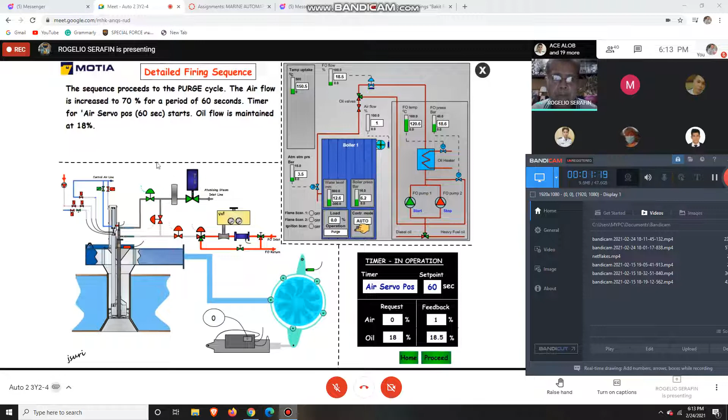Dito, ito yun siya. Naka-maintain yan siya ng 18%. Okay? So, nandyan siya. Makikita mo naman sa diagram, no? Okay. So, tuloy-tuloy yung andar ng forging fan mo. So, wala pa tayong ibang ginagawa dito kung maliban lang sa pagpasok na ng atomizing steam. Yan, nag-green color na siya. Okay, so we go for the next proceeding.

Okay, signal is sent to FD fan vane. Dito, yan o, magbibigay ng signal dito. Positioner controller. The FD fan vane start opening. Magbubukas to, hihilahin niya ito. Okay? If the airflow does not increase to 70%, the timer for air servo position expire. Air servo error alarm is activated.

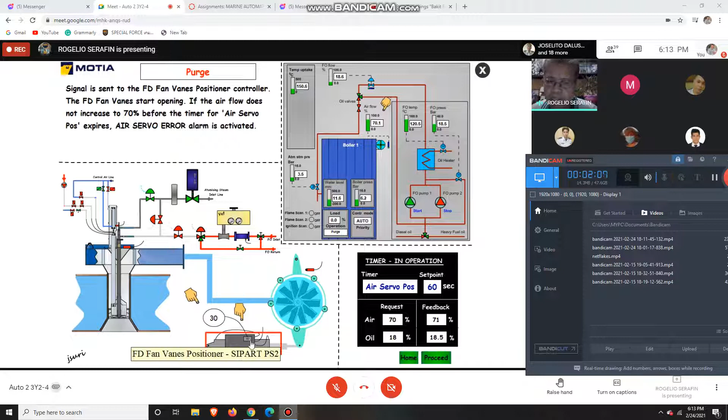So meaning, kapag hindi makumpleto yung 70% na ibinibigay niyang hangin dito, mag-a-alarma siya. It will alarm for air servo error with a period of 60 seconds. Okay. So, yun ang mangyayari. So, nagbibigay na siya ng signal dito na bubuksan na niya ito dito. Okay. So, once the airflow to 70%, the first timer 60 seconds start.

Okay. Mag-uumpisa. Ayan, no? Ang 70% na hangin na ibigay na niya, ang feedback is 70 also, 70-71. So, wala tayong problema dyan. Flow of oil is 18%. Ang kanyang feedback is 18.5. So, that is acceptable. No? So, walang alarm na nangyari. So, this condition is maintained for purging the period. So, ibig sabihin, pinapurge pa niya yan. No? Tuloy-tuloy yung purging niya.

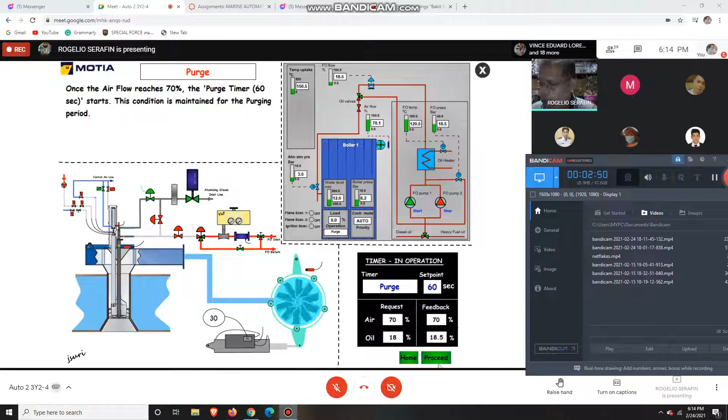And the next. Okay, so the next. Once purging expire, the sequence proceed to the next step, which is the ignition position. So, this will be your ignition position now. Here, this one. At ito, this is your diesel line. No? Itong kulay red na ito. Once na ito ay magbubukas at magiging green na ito siya, ito ay magiging green also to. This will be your ignition position.

No? Ignition. Yung ignition na sinasabi ko sa inyo, yung kanyang igniter, magbubukas. So, yung igniter niya, ang siyang magsisindi ng first stage of your burner. So, we have here two stages. The first stage is the diesel line, and the second stage is the bunker or heavy fuel oil. So, another name or another language of this is what we call the pilot burner and the main burner.

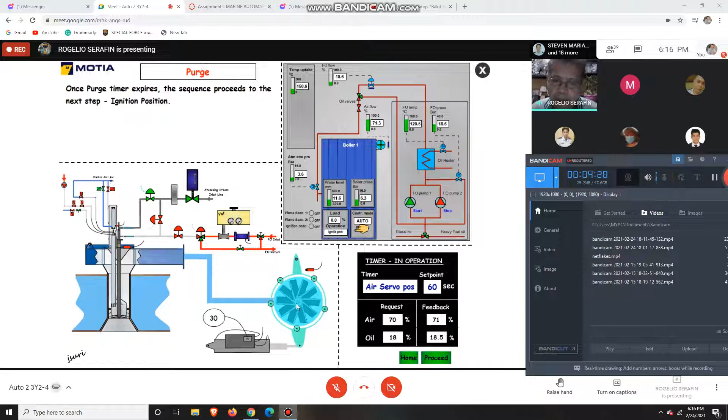So, dalawa ang burner nito siya. We have the pilot, which is this using diesel. And we have here the heavy fuel oil, which is this is your continuous firing. Okay. So, nandiyan na tayo sa ignition position. Still, purging pa rin siya. No? Maandar pa rin yung blower mo. So, air servo pos is 60 seconds. We are going to proceed.

Now, ignition position. Nakita na natin, no? Ignition position, pag yan ay nag-green na siya. Okay, yan ay green. Okay, nag-green na siya. Airflow reduced to 18%. Oil flow remains at 18%. The vanes positioner, start closing. This one, magsasara to siya ng konti.

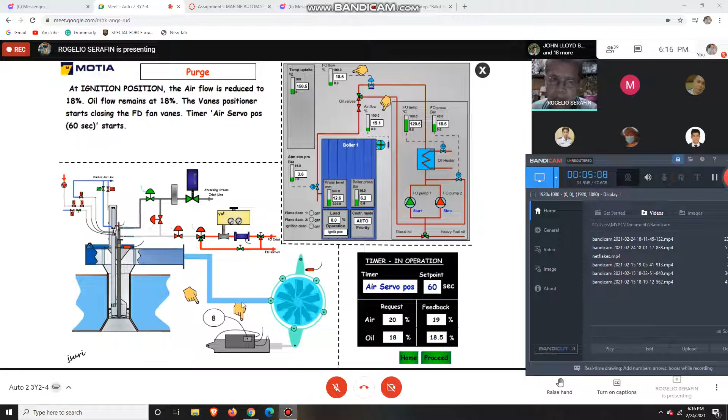The feed pump. Bakit siya magsisira? Para hindi mamamatay yung apoy dito. Kasi pag sobrang lakas ng hangin nito, mamamatay yung igniter mo rito. So the main position closing start FD fan, timer for air servo position is still 60 seconds. Tuloy-tuloy pa rin yung 60 seconds niya. Okay? So yan. Itingnan natin kung ano ang sumunod na mangyayari.

Okay. When the air flow does not reach 18% before air servo position timer expires, magkakaroon siya ng air servo alarm. So, kailangan umabot siya ng 18. Since that this is 20, this is already acceptable. Kasi nandito na tayo sa igniter position. Ayan, no? Nasa igniter position na tayo. Okay. Sundan nyo lang yung cursor ko, ha? Nandito na tayo sa igniter position.

And then, we go to first. Tuloy-tuloy pa rin yung purging niya. So, air servo alarm is activated. Else, the sequence can proceed to the next step. Ignition. The igniter position timer at 10 seconds start. Okay. Nakalagay dito, igniter position. Tingnan nyo dito sa may timer niya. And 10 seconds for the set point.

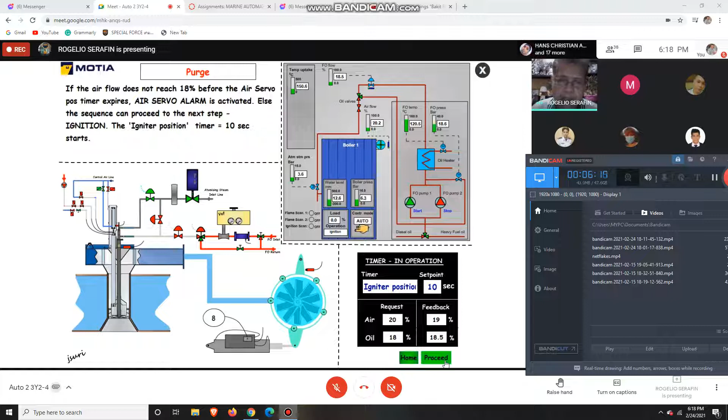Okay. So, let's proceed. Bantayan nyo itong fuel na to, ha. Bubukas yan pag naano na natin yung igniter. Okay, yun. Bumukas na yung fuel. O, kita mo na. Pumasok na. And then, the diesel is already started. Nag-firing na siya ngayon. Okay. So, it's already firing.

So, since that this is already ignited, ito yung igniter niya, dahil nagsindi na siya, nag-close na rin siya dito. Nakita nyo, nag-red na. Dahil mayroon siyang timer. There will be a timer to stop the electrodes. No? Okay. DO pump start, the DO solenoid and combustion air solenoid is open. Electrode starts sparkling. At the time, 12 seconds start. Okay, 12 seconds siyang mag-i-start.

So, yun ang sinasabi ko dati na mayroon siyang electrode na siyang magiging igniter to ignite in order to burn the fuel or the diesel oil. So, as of this moment, diesel muna yung kanyang kinukonsumo. Okay? Diesel muna ang kanyang kinakain. Okay, so yan, pumapasok yung diesel, this red line. After this one, bantayan nyo ito dito. Papasok na ngayon yan dito susunod. Para sa main burner, this will be your heavy fuel oil. This one. Yan, this will be your heavy fuel oil. Okay? So, 12 seconds ignition.

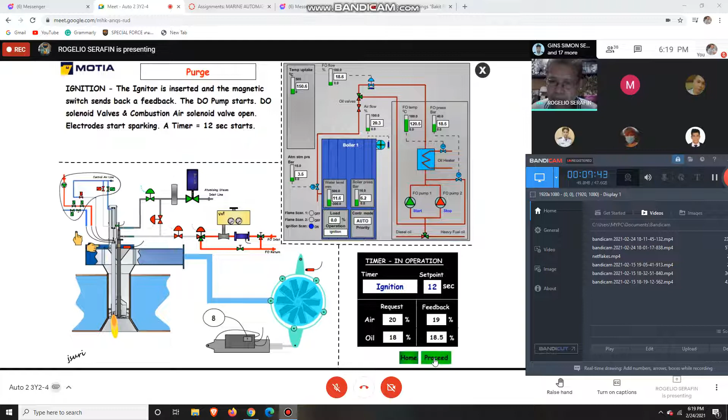And then, ayan, sinasabi, once pilot burner flame established, igniter flame send back. Igniter flame eye. Yung sinasabi ko sa inyong flame eye, the flame eye is located in this area. Ito. Ang siyang mag-monitor sa flame. If there's no flame indication, there will be an alarm. Okay? Igniter flame send back to the feedback, ignition scan indication on the ECR computers comes on. Ibig sabihin, pag nagkaroon na siya ng initial firing, makikita doon sa computer ng makina, sa engine room, control room, that the boiler is already firing. Okay? So makikita doon sa ignition niya.

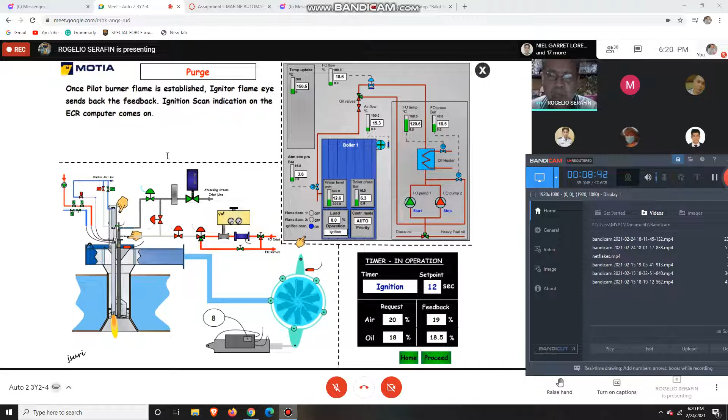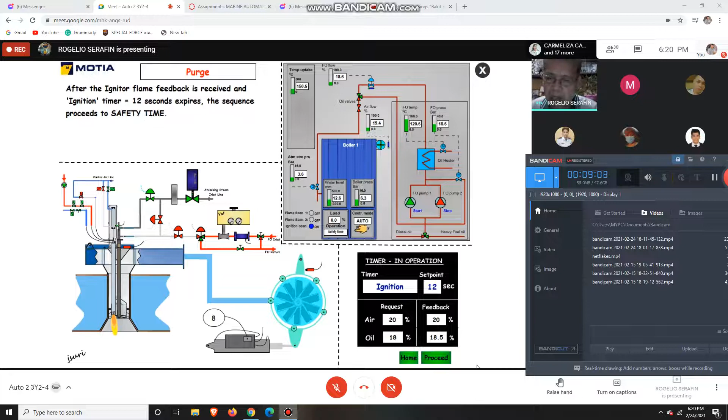Since that this is still a diesel, wala pa yung heavy fuel, ha? Wala pa yan. We are going to proceed. Okay. So anong sinabi? After the igniter flame feedback is received, and ignition timer at 12 seconds expire. Pag expire na yan, the sequence will proceed to the safety time. So mayroon pa siyang pinapaano na safety time. Ina-allow. And then, next is safety time is 10 seconds. Yung 10 seconds na binibigay is your safety time. At the same time, they will be open. Bumukas na siya, oh, nakita nyo?

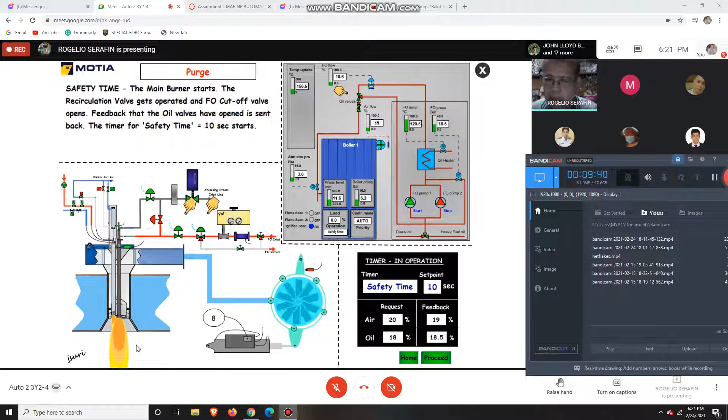Okay. Yan, pumasok na. Diesel, malaki na ang firing. This will be firing now. So, since na ito ay kailangan parahin yan siya. In expiration of sequence, papara itong diesel mo. Kasi, nandito na yung malaking firing mo. Nandito na yung main burner. Main na ito siya, main. Okay? And then, the flame eye. Okay, the flame eye na makikita mo, dito yung flame eye mo sa taas, dito, in this area. Makikita mo, come in action. Dahil kung wala itong makitang flame, mag-aalarma yan.